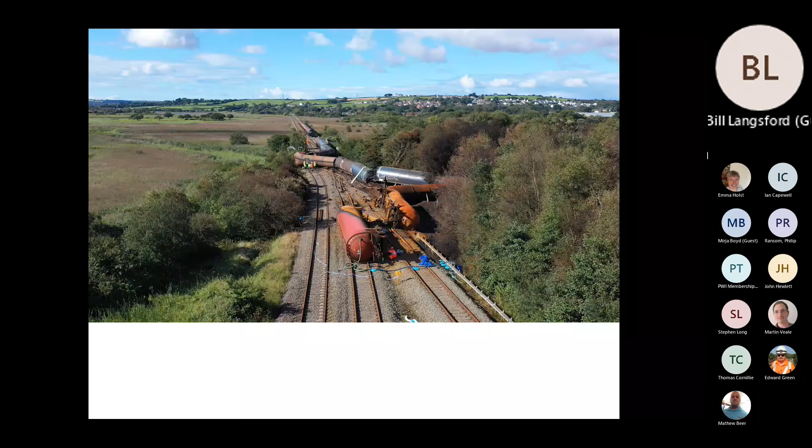Since then I've been an environmental regulator, regulating the water industry mostly. Most recently I was in flood defence and flood risk operations, then I've been sitting in the marine advice and planning team, where we license offshore wind and manage the protected sites around Wales. More latterly I've got involved with the two regulated shellfisheries in Wales, on the Burry Inlet and the Dee cockle fisheries, and again that's down to legacy research issues.

So I never really imagined doing that sort of career, that I'd actually end up giving a talk to the Permanent Way Institution. But I think my personal interests and my professional interests kind of came together on this one.

As you all know, on the 26th of August 2020, the oil train from Milford Haven heading east derailed at Morlais Junction near Llangennech.

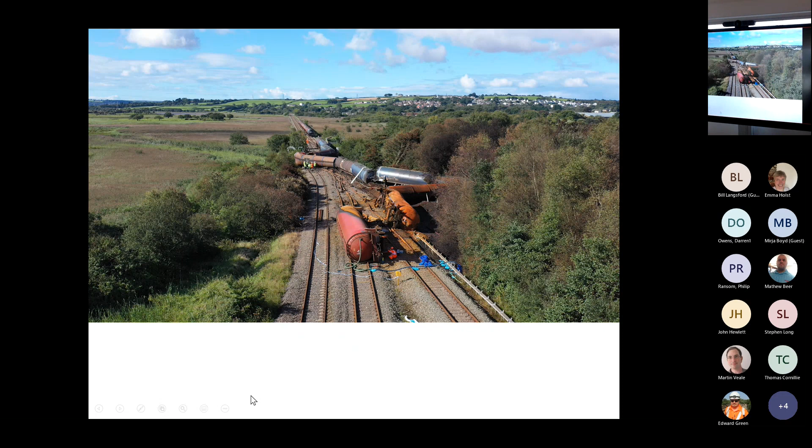As I said, I sit in the marine advice and planning team. Because I've been involved with incident management over the last 30-odd years, both in risk operations and on the environment side, and because of my knowledge of this particular estuary, the Burry Inlet, I was asked to be the recovery manager for the Llangennech incident.

This wasn't just Natural Resources Wales - under the Local Resilience Forum we're category 1 responders, so along with emergency services, but also the county councils, food agencies and so on, Public Health Wales. This was very much a joint effort, and there's no one single organisation - we couldn't have done it without everybody else getting involved and contributing. I've never worked with such a diverse and wide group of organisations before.

So before I get into the details of the incident and the actual recovery operation, I'll just tell you a little bit about the Burry Inlet and Carmarthen Bay and Estuaries area.

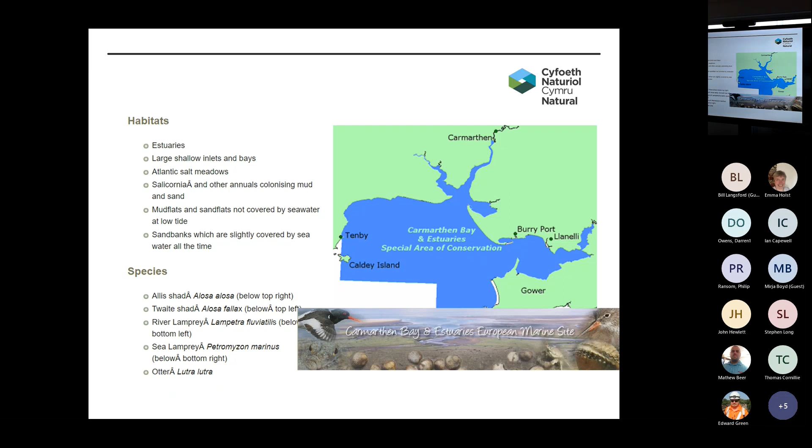It's pretty much got the highest level of environmental protection you can get. It's a special area of conservation, it's a European marine site. It's a Ramsar site for overwintering birds, and it's got a number of SSSIs and special conservation features around it, so it's designated for a range of different habitats and species, but primarily its importance for overwintering birds is what makes it really important.

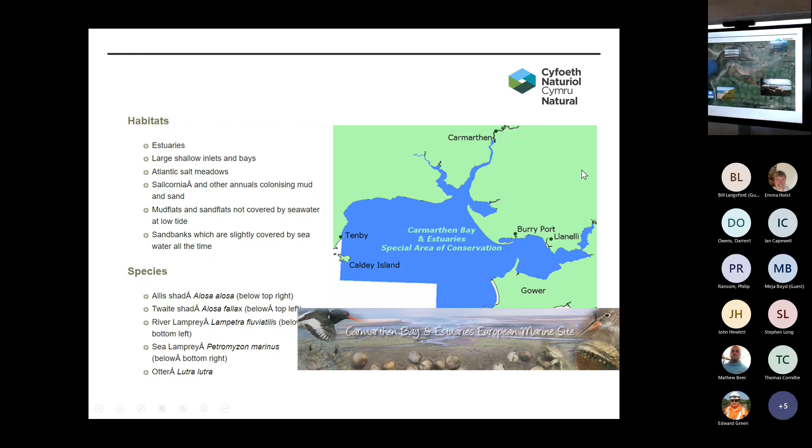The Burry Inlet is also a well-renowned shellfishery. It's quite a complex area with a number of issues. The conurbations to the north are highly populated, from Burryport through Pwll, Llanelli, Gowerton, Bynea - so quite dense populations, and the whole west of Swansea as well.

They all have sewage collection systems feeding into Llanelli wastewater treatment works, with a number of storm overflows dotted around the coast, and the same on the Gower side. You've got two blue flag beaches at Pembrey and Rhossili, just south of the estuary, and a number of undesignated bathing beaches within the estuary as well, at Burry Port and, to a lesser extent, Llanelli.

You've also got the largest salt marsh in Wales, Llanrhidian Marsh, and salt marshes extend further up the estuary as well, heavily grazed for salt marsh lamb. Salt marsh lamb is a well-renowned delicacy, along with the shellfish and cockles from the estuary itself, and that gives us a bit of a conflict in terms of regulation and management.

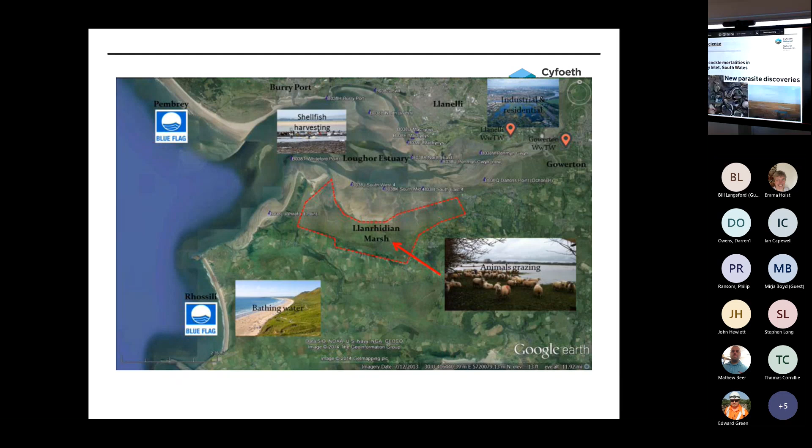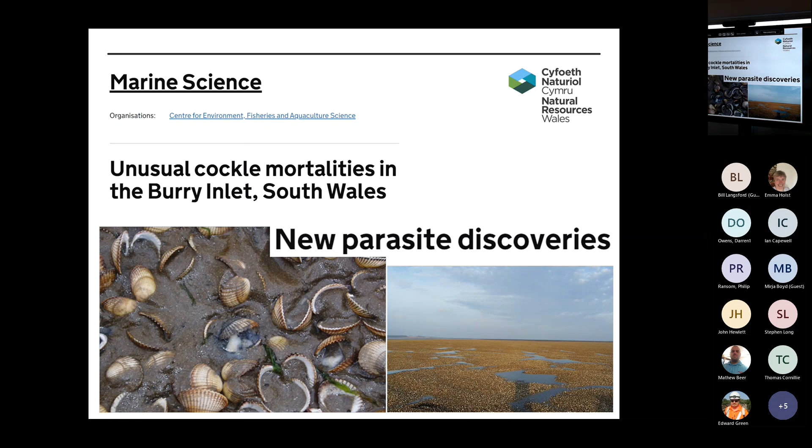It's had issues in the past, going back to the early 2000s. What was one of the most productive shellfisheries in the UK, or possibly in Europe, suddenly the shellfish started dying - the cockles were dying en masse, huge swathes of mass mortalities. Nobody knew the reason why, and various investigations were put into effect.

Because of my water quality background, I was asked to manage the Welsh government funded investigation at the time, and we were working with universities from around the UK. Lots of modelling was carried out.

This is just an overview of the hydrodynamic modelling we use - Dŵr Cymru Welsh Water models, but we asked them to develop these models as part of the National Environment Programme or the Asset Management Programmes. Basically you've got a series of nested models - Atlantic models, very coarse scale, moving into Celtic Sea models, slightly finer scale, and eventually getting finer and finer until we get to models for the Burry Inlet, where the resolution of the cell size is down to just a couple of meters. It's really hard to model hydrodynamically simply because of the shallow water and the very dynamic nature of the estuary.

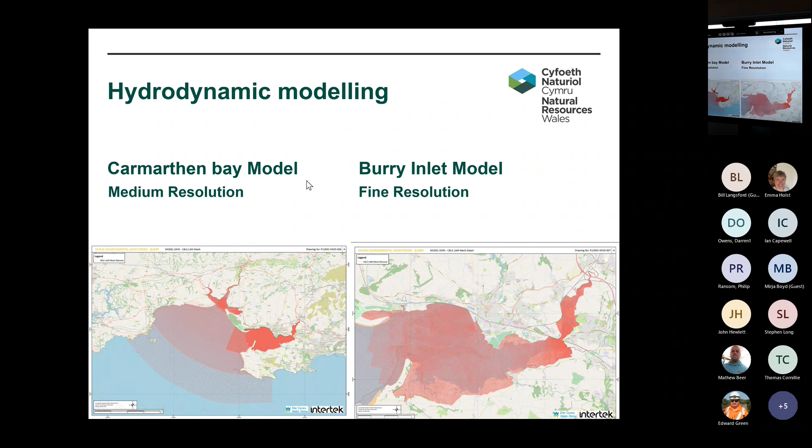It's a bit of a delay.

One of the things we use the models for is we want to know what the water quality is at all different points within the estuary, because this is where the shellfish beds are. So this is what source apportionment does. All of the inputs, including sewer network inputs, river inputs, and diffuse inputs like the runoff from the marsh on the south side, are all plugged in. Then based on those little cells you saw, which calculate movement, exchange, and dilution between each of those points in 3 dimensions, eventually you can work out the quality in different places.

This is a huge part of what we do, and it drives the improvement programs we have in place. This is what drives where Welsh Water spend their money to put better storm overflow storage systems in place, which is really topical on the news at the moment. In the Towy and Gwendraeth catchment areas, they were doing sustainable urban drainage and storm water storage 10 years ago, before it only just started hitting the national debate now.

So Welsh Water spent about 115 million, basically putting in a system converting any green space, roundabouts, school playing grounds, and putting new surface water sewers in, to basically take surface water out of the foul network, to protect the bathing waters and the shellfish waters in the Burry Inlet and Carmarthen Bay area.

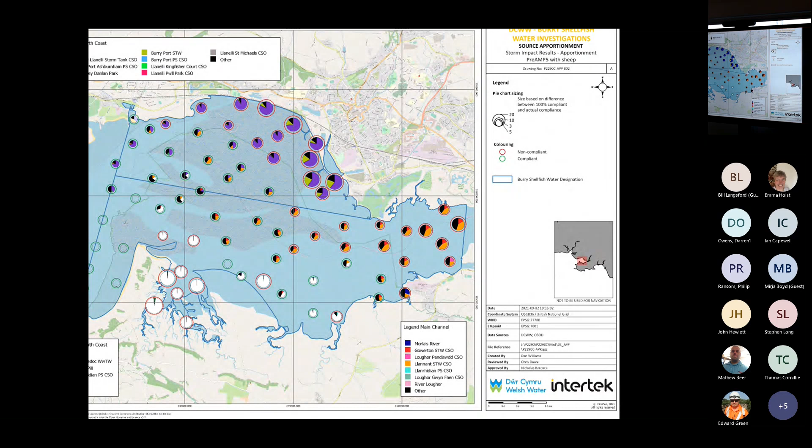This is the kind of output of some of the models we get from modelling the salt marsh here, just to understand what the bacteriological inputs were into the estuary.

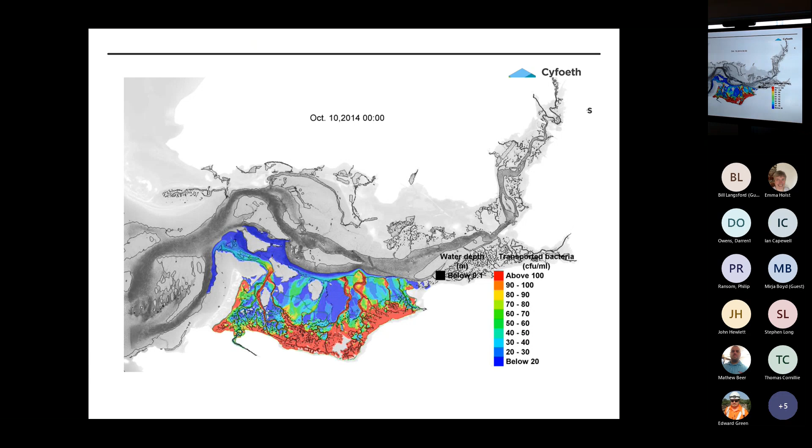Most recently, as I mentioned earlier, the cockle mortalities that had happened a number of years ago continued until very, very recently. We did a UK study investigation. We found out all we could within the UK, and came to the conclusion it was probably parasites, probably linked to either climate change or changes in the industry in terms of where cockles are sold and processed, what's brought into the area, biosecurity, and all those kinds of things.

So we were very lucky, we were able to push to get onto an EU-funded programme, which we probably wouldn't get onto now - the Atlantic Programme, where the Dee estuary and the Burry Inlet in Wales were part of this international collaboration. We had about €3.5 million and scientists right across Europe in 5 different states, focused purely on bivalve filtration corridors. Some really interesting things came out of it, in terms of disease risks in Southern Europe becoming more prevalent in Northern Europe, ocean current migration, and all these kinds of things.

So it's probably fair to say that this estuary is probably better understood than any other in the UK, from an environmental point of view, a hydrodynamic point of view, a hydrogeomorphological point of view, and from a biosecurity, shellfish disease, and shellfish hygiene perspective. It's certainly one of the best in Europe in terms of its level of understanding. We're really proud of what we've been able to do, what we've found out, and how we manage the fisheries and ecological features of the area.

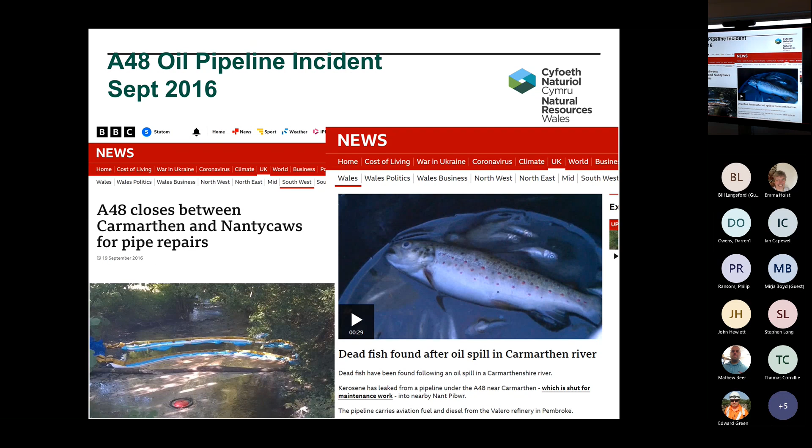It was probably simply because of the weight, because of traffic and so on. So they needed to do some repairs, and they planned to close the eastbound carriageway of the A48 for the week.

They basically dug a big trench, only under the eastbound carriageway, but the westbound carriageway was fine for some reason. The pipe was about 8 meters down, so it was quite a bit of depth. They got their GPS coordinates slightly wrong, so while they were putting their sheet piles in to make the trench, they actually put one of the piles through the pipe.

So I was sat in our office in Llandarcy in Swansea, minding my own business one Wednesday afternoon, and a call comes in from our Carmarthenshire environment team saying, 'We've got a bit of a problem, can you open up our scene room? We've got some oil in a river.' We often get oil incidents - domestic oil tanks, road traffic collisions - those type of events. You're thinking okay, 300 litres, through oil absorbers, spillage mats, you'll probably be fine. Then we get the report that it's 30,000 litres. So it's like, okay, this is a bit different.

The final figure turned out to be 140,000 litres, probably about half what Llangennech was, but it was into a very contained small stream a few miles east of Carmarthen, which discharged into the upper Towy estuary and again threatened shellfish beds. So it was a bit of a dilemma - we knew the oil was going into the river, but we didn't know where else it was going.

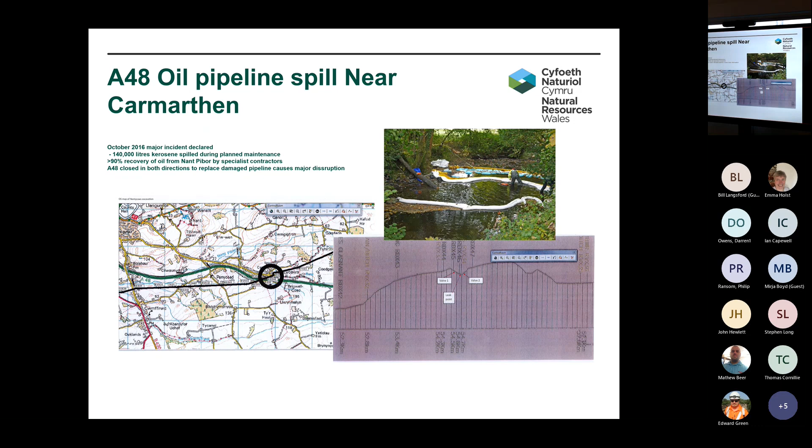Coincidentally, just last week we've had another oil incident on exactly the same stream, a similar amount, about 70,000 litres again. This time it was the service station at Nantycaws - somebody broke in, they've got overground diesel storage tanks, and somebody tried to nick about 20 or 30 litres for their car, put a siphon in, drove away, left the siphon in place, and it just drained the tanks completely. For a stream which had a huge amount of investment and was restocked with fish after the first incident, it's just been hit again. So we need to move away from oil as a fuel source, I think.

Okay, so just a little bit on the structure and how the incident was dealt with, back to Llangennech. On the night of the 26th, it was declared a major incident, and the usual local resilience forum command structure gets put in place - gold, silver, bronze command - and all of the LRF responders were working. It triggered the normal oil spill response, so the Maritime and Coastguard Agency was involved. They've got specialists who can do specialist modelling, using standard models as shown earlier. An environment group was set up, and its purpose was to ensure public protection and protection of the environment.

So I'm going to go through all of the statistics with you again. It's been the largest oil incident we've dealt with since the Sea Empress oil tanker disaster down in Milford Haven, although it wasn't anything like as large in quantity - it's probably only about 10% of the Sea Empress.

The locations were so much more sensitive in terms of affecting shellfish, affecting SSSIs, affecting special areas of conservation.

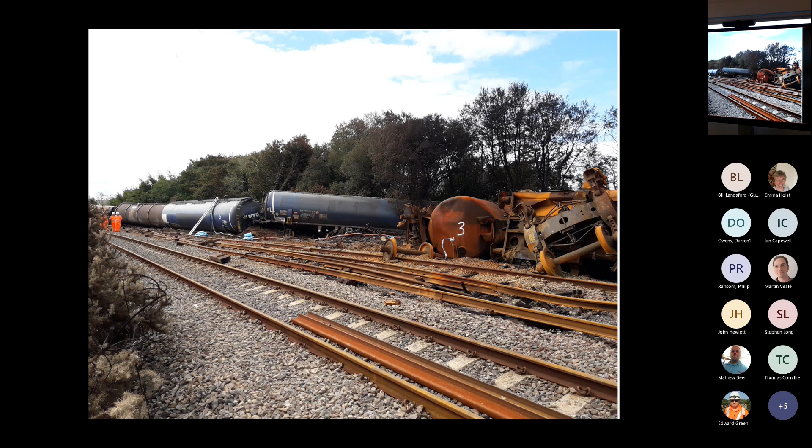We're on site doing similar work in the other part of the estuary. So after we got as many samples as we could, as soon as the crash site was declared safe, this was what confronted us. You've probably seen all the pictures before, but this was the wooded area to the north - this was the area primarily affected by the fire, and it was just pools and pools of oil on the surface.

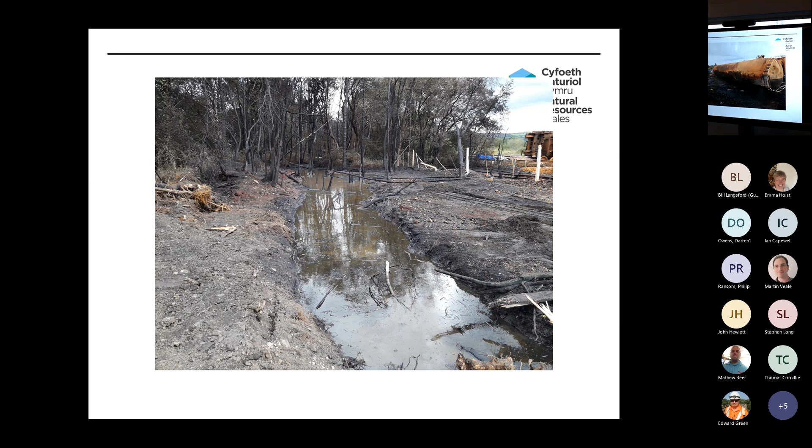So it was, as I said, you know, 30, 40 years, never ever encountered anything like this. It was quite sobering just to wander around and see the immediate aftermath.

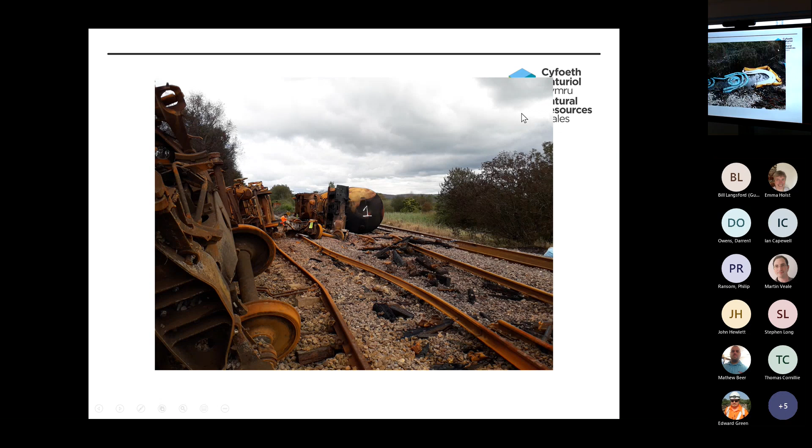Attempts were being made very early on to put dams in place, those cesses, those ditches to the north and south of the formation, and basically whatever oil absorbers were being put in place, filters were being put in place. So very quickly, mitigation measures were being put in place and assessments were being carried out.

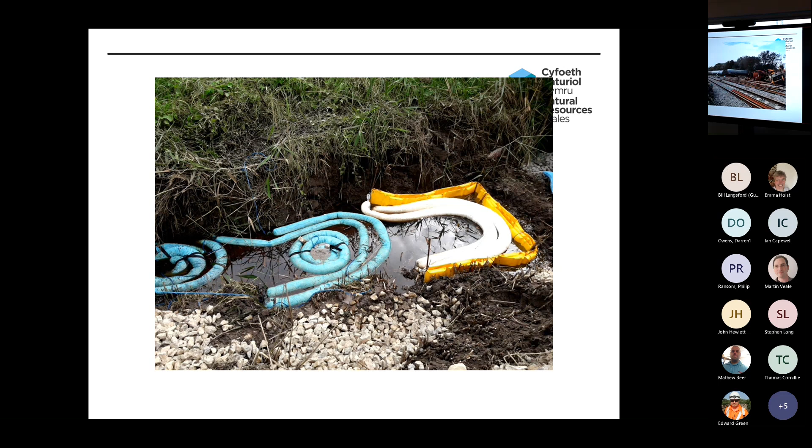The first week or 10 days, it was still in emergency mode. 400 people had been evacuated from their homes. They were put up in local accommodation, village halls and things like that for the first 24 to 36 hours.

There was the Strategic Command Group at the time, which was actually being chaired by the British Transport Police - it was under their jurisdiction. And then there's the various silver and bronze groups and the environment group.

My involvement was then mostly through the environment group, and we were thoroughly influenced by studying models from the Maritime and Coast Guard Agency telling us where the oil was, what concentration, how it was spreading out into the Burry Inlet, Carmarthen Bay, and so on.

The fortunate thing was the oil is a relatively light oil, so relatively volatile. So it doesn't stick around in the environment that long - it's not going to give the same long-term effect that, say, a heavy crude has got.

So it was a constant getting samples from the shellfish - they were going off to CEFAS, the Centre for Environment, Fisheries and Aquaculture Science. They've got laboratories on Lowestoft, so we would be shuttling samples back and forth to Lowestoft.

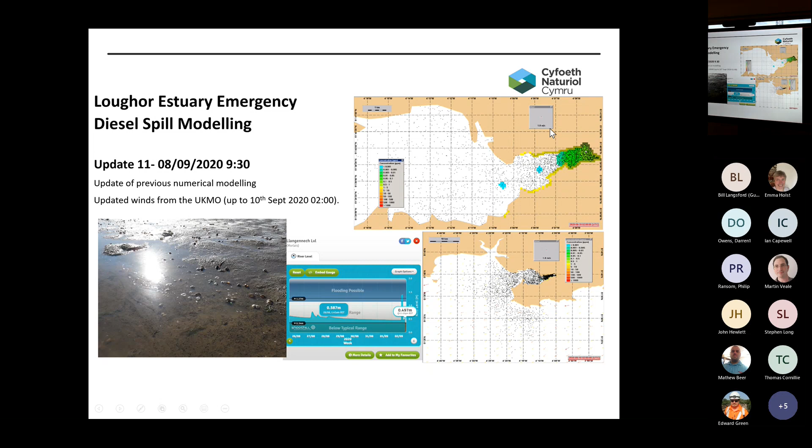So this gives you an idea of where those sample points were out on the estuary. There were mid-channel samples, taken by boat obviously, and then shore teams taking samples along the tide line.

The red dots are where oil was being found, green dots were clear. What was reassuring was that the actual models, the Maritime Coast Guard Agency models, were reflecting very well what we were actually seeing on the ground. So that gave us quite a lot of confidence that we could trust the models.

The part at the bottom left, that's our shellfish sampling points. The red dots is where we're taking samples specifically for shellfish to go off to be monitored for polyaromatic hydrocarbons, sent off for analysis. The purpose of that was basically to check levels of aromatics in shellfish flesh, and that was for public health purposes.

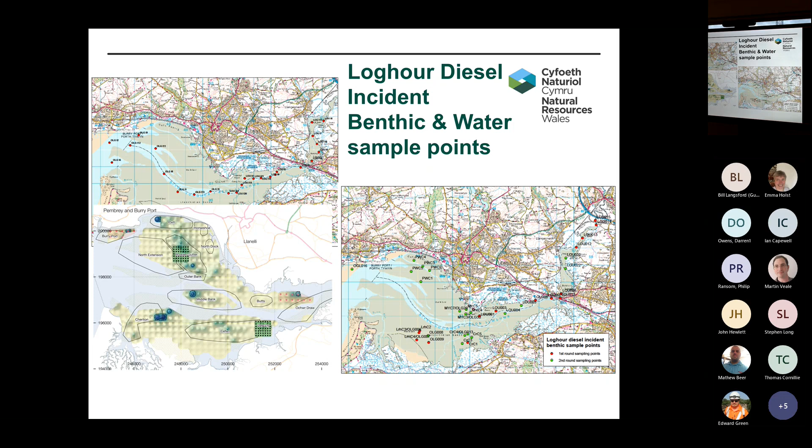We were working very closely with the Food Standards Agency, Swansea and Carmarthenshire Public Health Departments, and Public Health Wales.

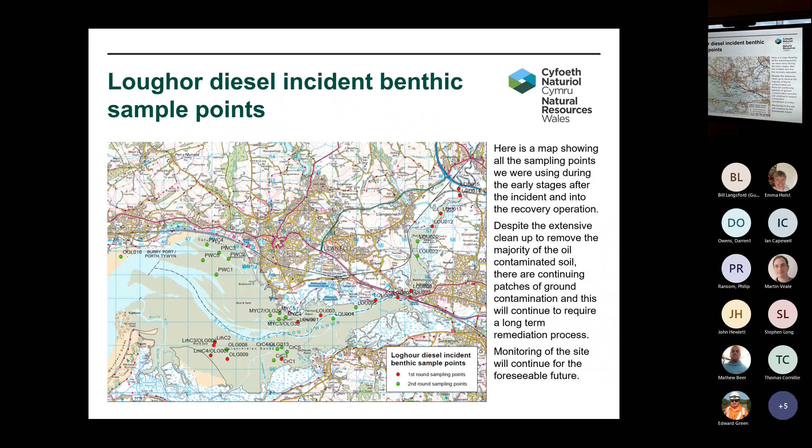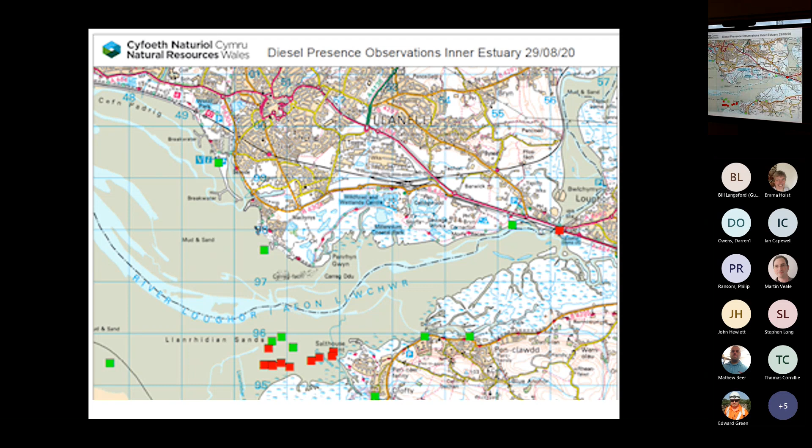I think that's just a zoom in of that last slide. We concentrated on some of the Crofty area, which was actually where the shellfish beds were, so that was an area that got a bit of attention.

I think it was about 10 days before the emergency phase of the incident wound down. Up to that time we'd been having daily silver bronze meetings, daily environment groups.

Once the site had been cleared and was safe, once it was out of emergency phase, it quickly went into recovery phase. That's really where command and control of the recovery operation then moved to Natural Resources Wales. Martin Evans, the South Wales Area Operations Manager, then became Strategic Command Group chair, and I was working directly for Martin, trying to coordinate all the information between the various groups.

So the meetings went from daily to weekly. The tactical group was primarily focused on the public health elements of the incident and the impact on the shellfish. That was chaired by Stuart Thomas, head of public protection in Carmarthenshire.

Then sitting below the SCG we had a separate public health group, again with representatives from Food Standards Agency, Public Health Wales, and various other organisations. The environment group was still standing at this stage, but that then got subsumed into all of these groups as the recovery operation continued.

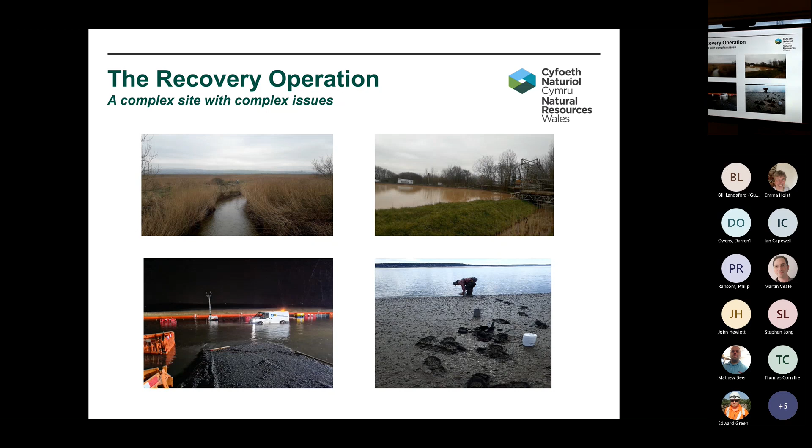We had a number of mini storms, the whole site was flooded out on several occasions, and not least we had the Morlais water treatment system right alongside the crash site.

This is just a bit of an overview of the crash site. You've got the Morlais water treatment settling ponds to the north, and then the junction between the Swansea district and the Heart of Wales line, where the derailment actually occurred.

You've got the heavily contaminated area, the purple hatched area in the middle, which is where most of the tank cars that ruptured and caught fire spilled their oil. So that was deep contamination of the formation there, and the water area just to the north.

We then have the extended area, which is the light grey, which was firewater contamination basically, so it had been low runoff. It was fortunate that the Fire and Rescue Service had a good, ready supply of water from the mine water settlement ponds. But there was an awful lot of runoff, and a lot of secondary contamination away from the actual main contaminated area.

And then we had two drainage ditches. The southern ditch, just on the border of the Marsh, which was a triple SSSI and a protected habitat. And then the northern ditch, between the Coal Authority land and the formation. So that was basically it.

And very quickly, boreholes were being sunk. Adler and Allan, who were the specialist contractors doing most of the work, working with Jacobs for Network Rail, were very, very keen to understand where the oil was, how deep it was getting, and started to think about the detail of the mitigation measures.

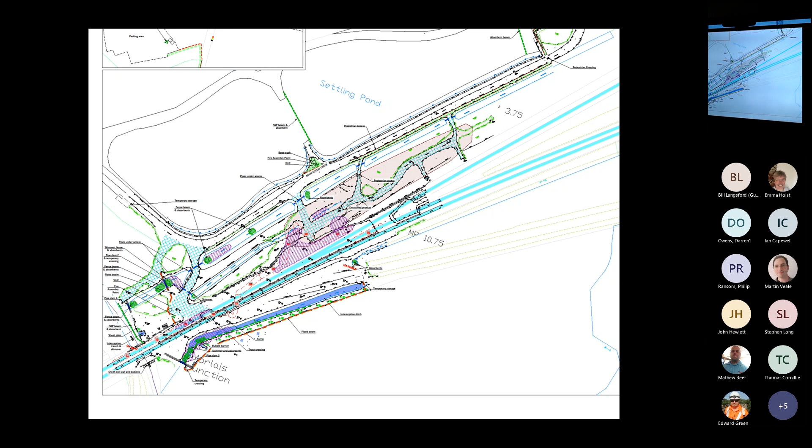So I'd say a little bit about the Morlais water treatment system, because it was a key feature that we couldn't ignore, and actually dictated working very closely with the Coal Authority, because a lot of the impacted area was actually their land. There was also some serious concern about damaging this and causing subsidence because of the excavations that took place later, which could have actually eclipsed the oil pollution incident in the first instance.

So the reason this is here, the Morlais mine water system, or mine system, the former Morlais Colliery and Brookfield Collieries on the other side of the estuary, one of the largest colliery complexes in the area, was discharging from an extensive network of abandoned mine workings, some of which are actually directly underneath the crash site. It was discharging ochre, or iron oxide, which is toxic and was actually causing parts of the Loughor estuary to fail its environmental quality standards.

There was basically a rust-coloured plume going into the estuary prior to 2003, when this scheme was put in.

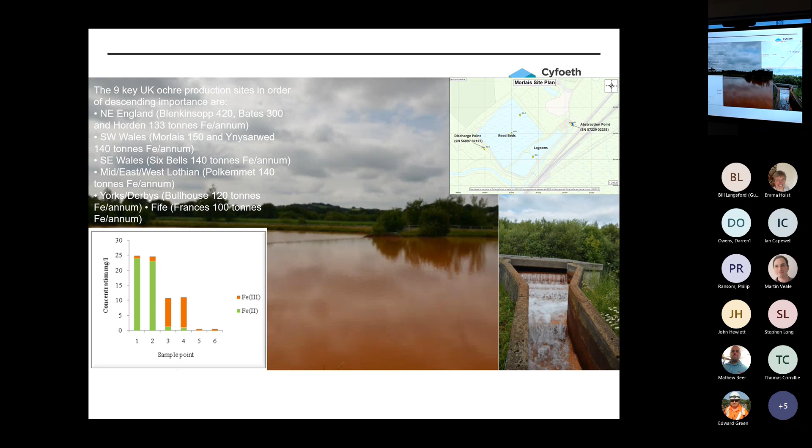So it's quite an impressive system. I mentioned the underground workings.

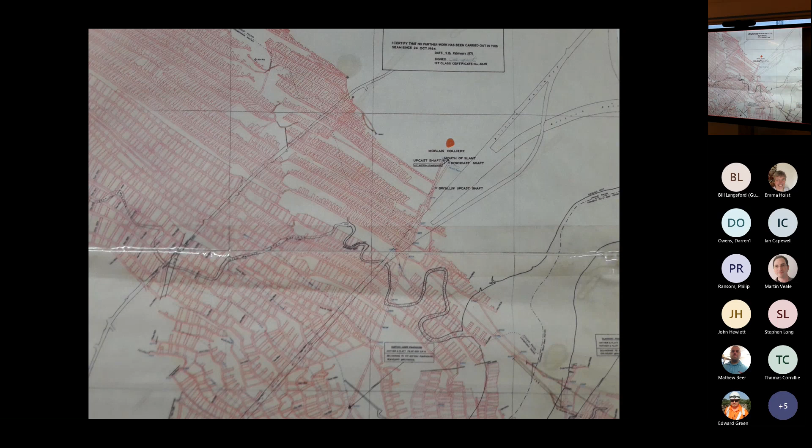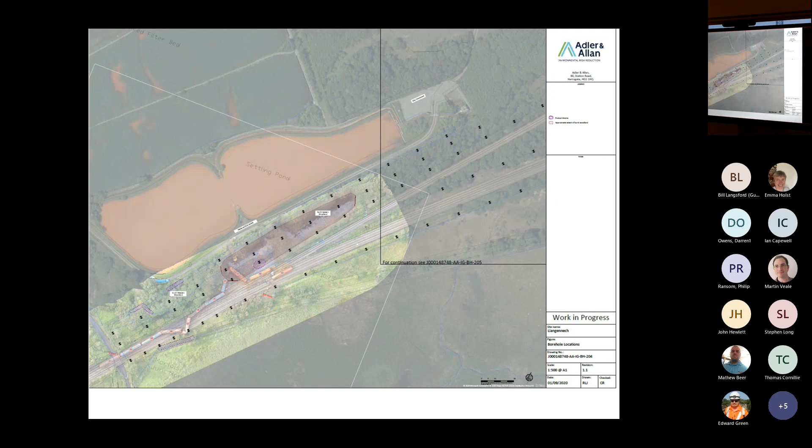And just on the plots, really, just to give you a feel of how the surface oil was being removed: pipe dams were created on the north and south sides of the two ditches, with absorbent materials, booms and oil skimmers basically. Not rocket science, but it works really effectively.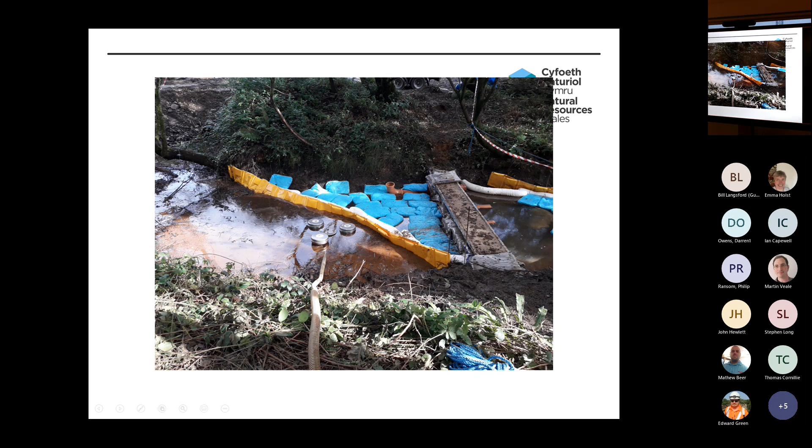This was during the intermediate phase of the works, where boreholes were going in, and this was all about going about wherever the plumes of oil were in the ground, and deciding what the best mitigation strategy was going to be.

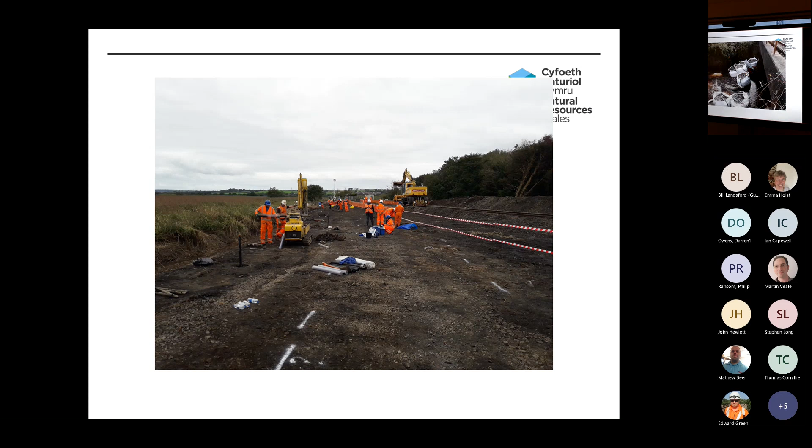The processes were: do you just leave it there? Do you try and pump it out? Do you use some sort of active treatment system? Or do you just remove all the contaminated material, as much as you can? It was the latter that eventually won the day, primarily for speed, because treating groundwater and contamination is a long process. These were bags of ballast going in.

Again, the Afon Morlais was a particular problem because this was on the southern side of the site, and there was a lot of oil escaping into that. So it was a case of trying to make a bit of a dam, a bit of a pool.

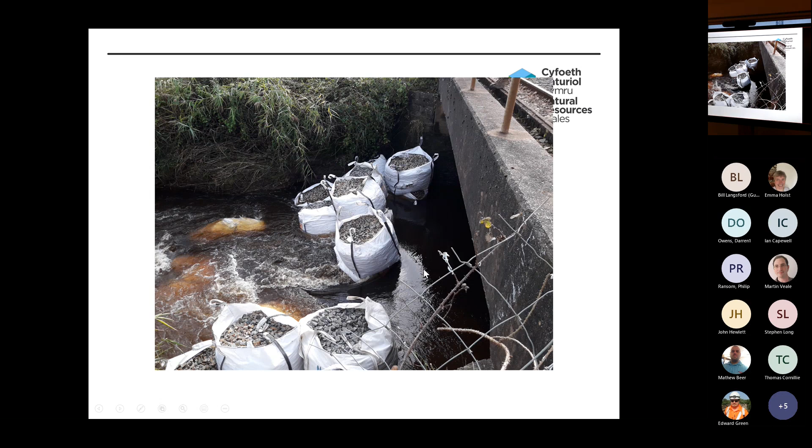This allowed a network of pools, pillows and skimmers to be set up upstream. This is the first east abutment of the bridge over the Afon Morlais, and there's quite a bit of seepage coming out around that structure. So there's a number of layers of defence trying to protect that watercourse.

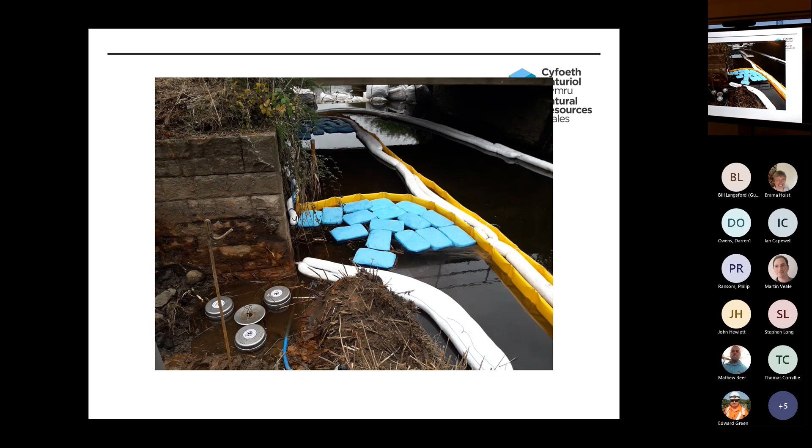That was the more permanent structure, which actually required land drainage consent from our flood engineers to put in place, which they did in a day. Pretty impressive, because they normally take months.

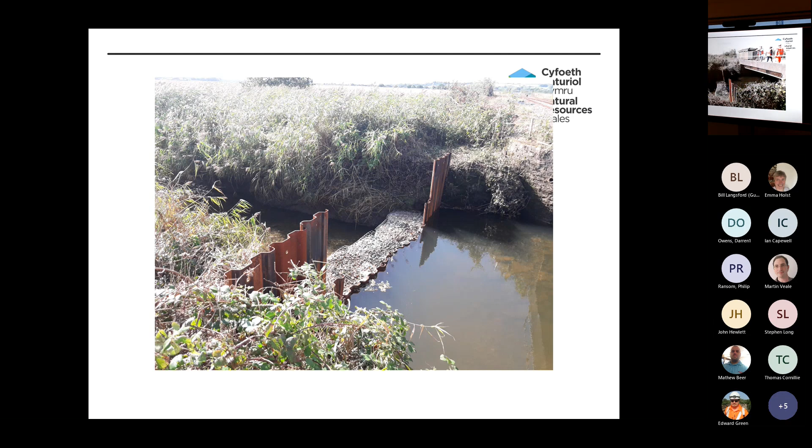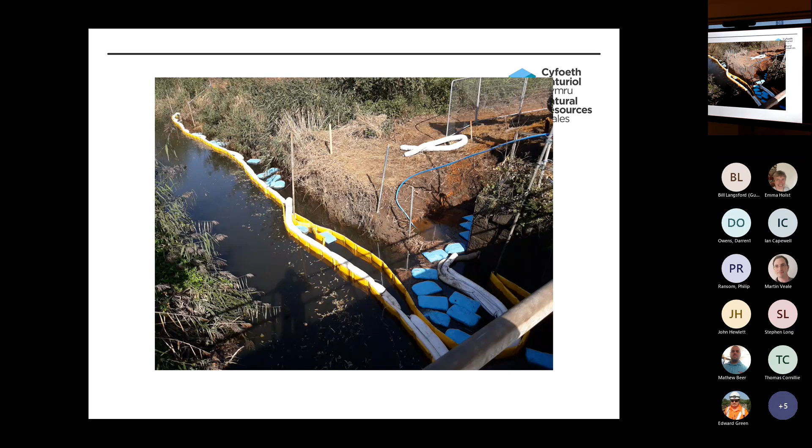Again, that's a view from the bridge of the booms trying to stop the oil coming out from the bridge abutment.

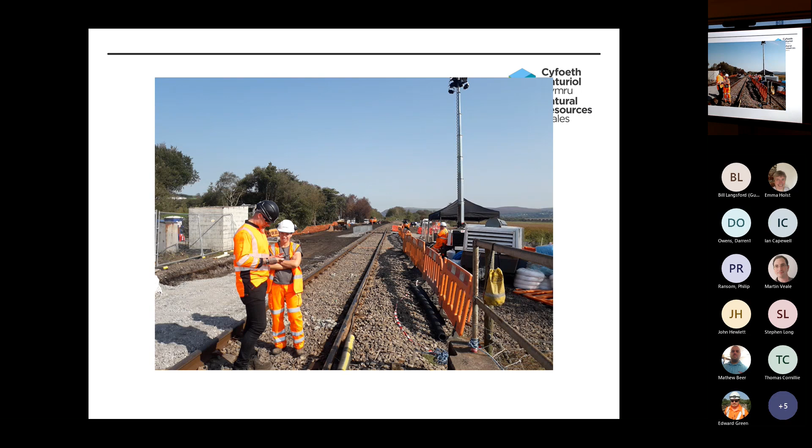So what you've got is a series of booms, pillows, and a double barrier. The idea of the double barrier is that when the tide comes in, it basically keeps the oil film to one side and protects the marsh area. And that was really effective.

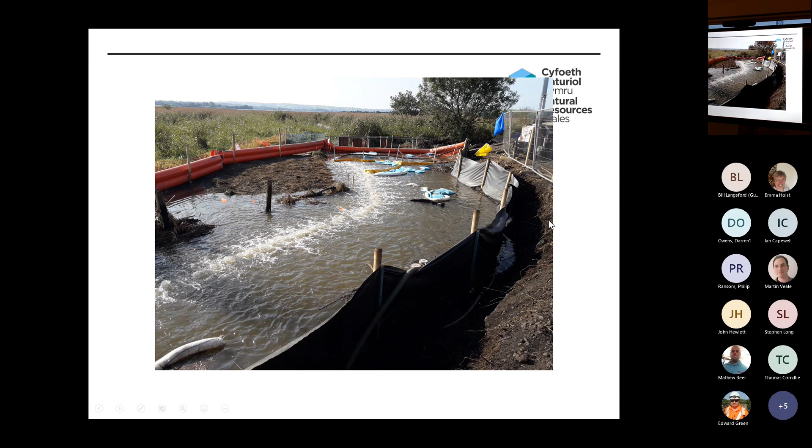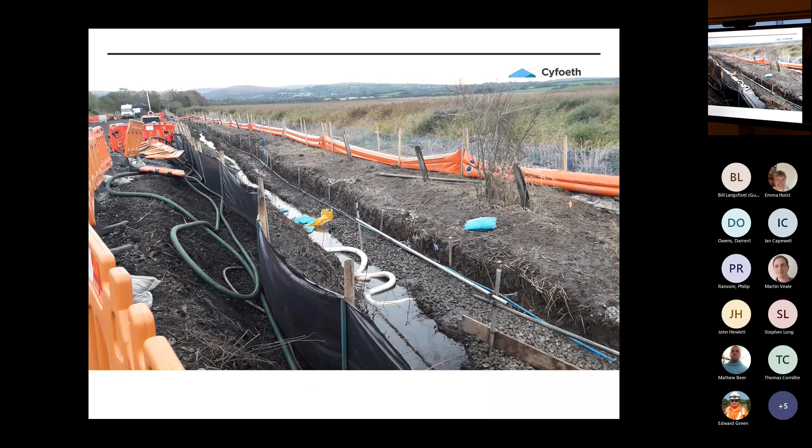That worked very, very well. I've never seen that before, but really, really impressive. That's with the tide out. You can see the blue pipe, which is basically the perforated air pipe, which provides that bubble barrier. And there it is again in operation.

When we started getting to the decisions made, there was lots of discussion, as I mentioned, about the best way to treat all the material, and the decision was made fairly quickly that because we needed speed to get the Swansea District and West Wales lines back open again, probably the best approach was actually to excavate as much of the contaminated material as possible.

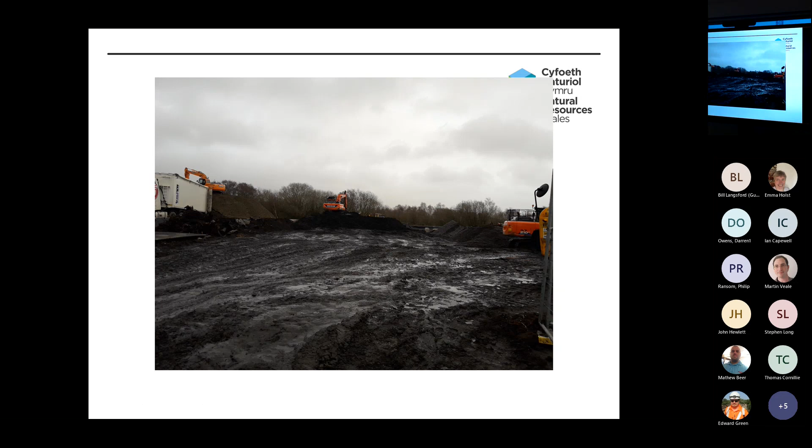So this was works up on the top end of the site, where they started to create areas where contaminated material could be moved and dewatered for taking away.

All long-term structures will be put in place again on the two ditches. This is a constructed oil interceptor.

Again, it required environment permits - two permits actually. It passes through two chambers with pipes below them - contaminated water enters, oil flows to the top, and then there's a secondary sort of scrubbing chamber, if you like, where hopefully you take all the oil out in the first, but you've got a second shot at it, so with skims again.

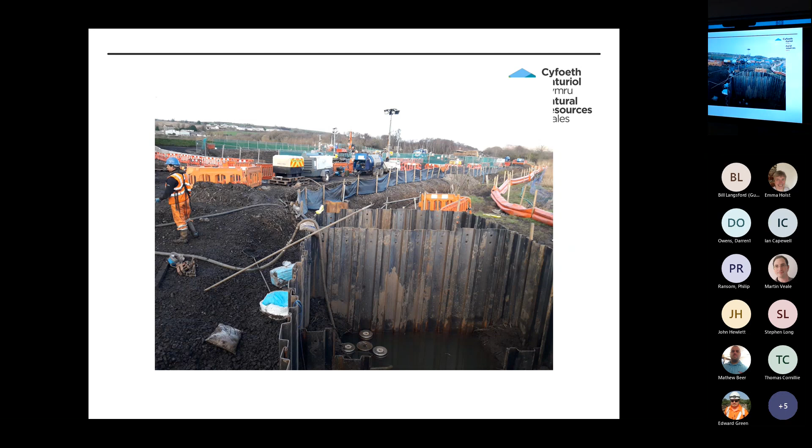So those are long-term - those are going to be in there for probably years as a precaution. And that's the completed structure. That's the north one.

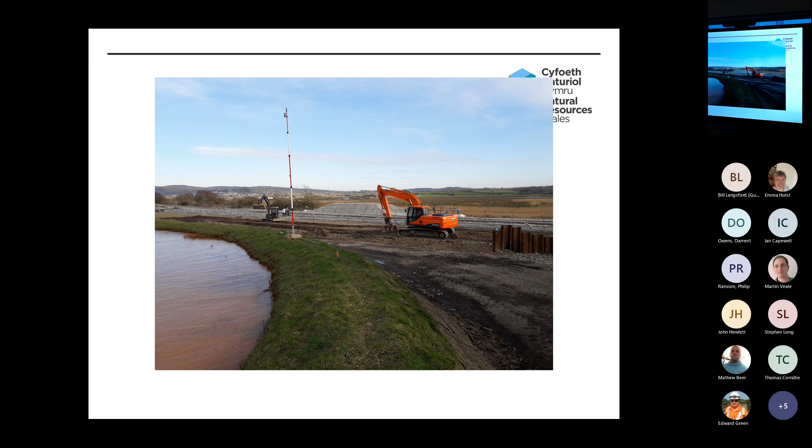This is the view from the edge of the lagoon, and this is where the excavations were beginning, basically, to remove something like 12,000 cubic meters. It stretched something like 150 meters by 20 or 30 meters wide, and something like 30,000 tons of contaminated material was taken away over the December, January, early February periods, 2020, 2021.

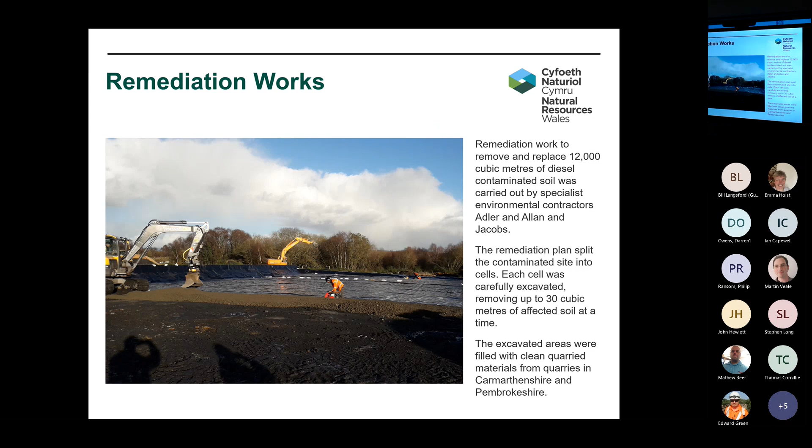That contaminated area was basically dewatered, and the bottom of the area, which was about the size of 3 big swimming pools, was put in place on the top half of the site.

So that's the plan for the excavation, basically the removal of the contaminated materials. It was a series of cells. The idea was each cell could be completed in a day or 2 - we didn't want the rest to go off. Once a cell was excavated, they wanted to backfill it as quickly as possible because they didn't want the oil material remigrating in and contaminating the further area.

There were some areas where we were concerned about upwelling mine water and didn't want to dig too deep there. It was quite a complex process deciding exactly how far you could go, to take as much material away as possible without creating unnecessary risk. Another concern was the bund of the settlement lagoon for the Port Authority lagoons, which were very close - probably 2 or 3 meters above the track, with excavations 2 or 3 meters below the track. So there was quite a head there, potentially, if there'd been any subsidence with heavy vehicles moving along that track.

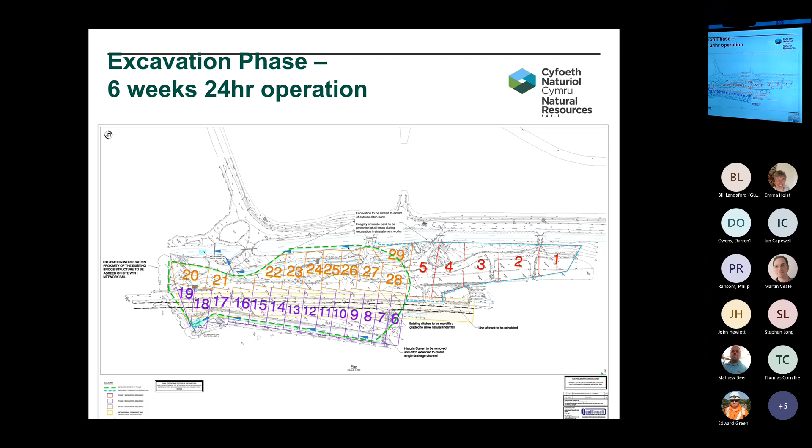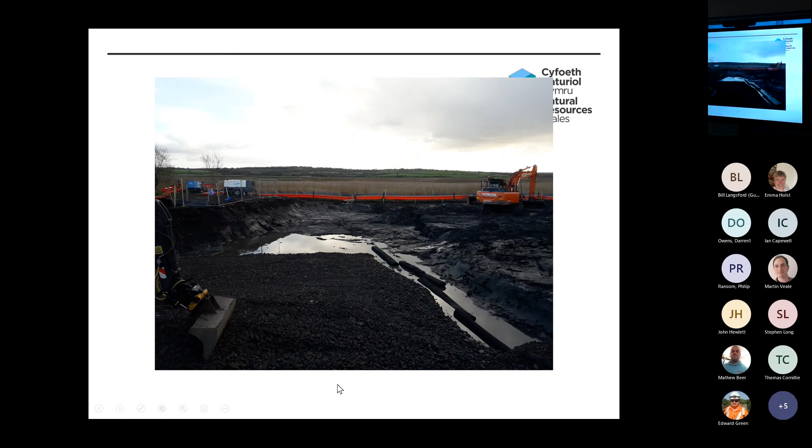Very good. So this was some of the excavation - this was one of the cells being excavated and then immediately backfilled.

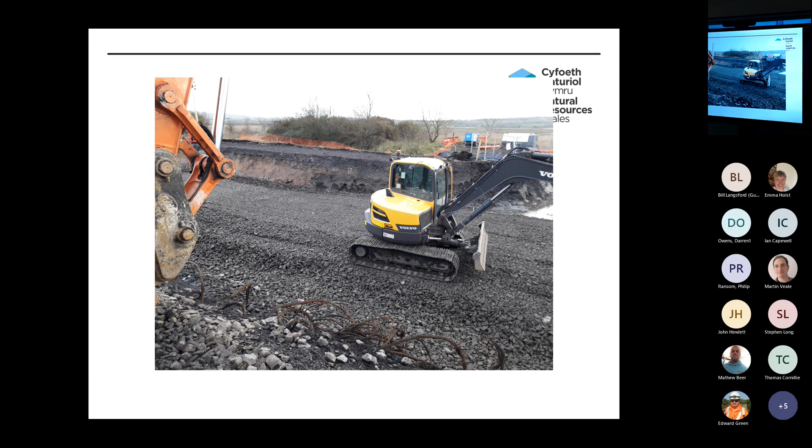We went to quite a length to make sure that the quarry material brought in was actually sourced from local quarries in Carmarthenshire and Pembrokeshire, to ensure its structural and geological chemical properties matched the bedrock and carbonaceous material already there, but also had the correct pH properties, because there were concerns about leaching to the triple SI. So it wasn't just any old rock - there was a lot of thought process in sourcing and finding the right material with the right structural properties.

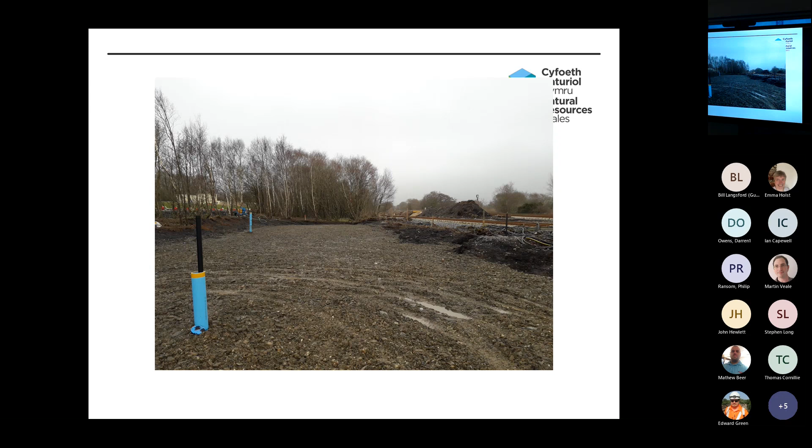So it was a continuous learning process and understanding - has the excavation process achieved what it was supposed to have achieved?

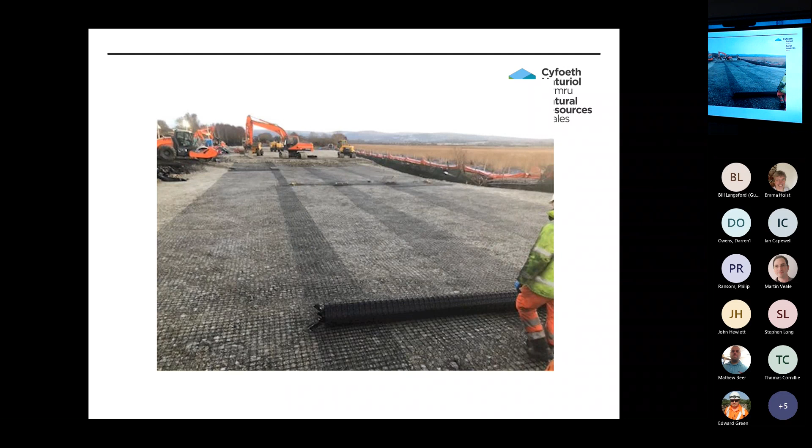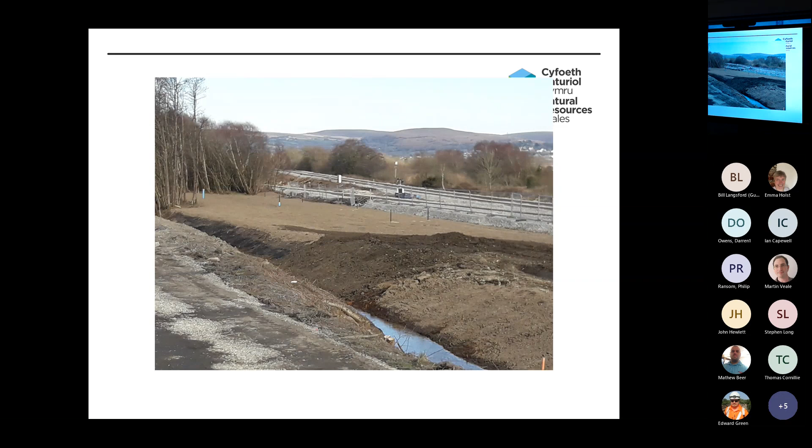That's just an aerial shot nearing completion of the backfilling process - the final compacting, HDPE liners and netting for structural integrity, then the final tracks back in place, and the final landscaping and topsoil going back.

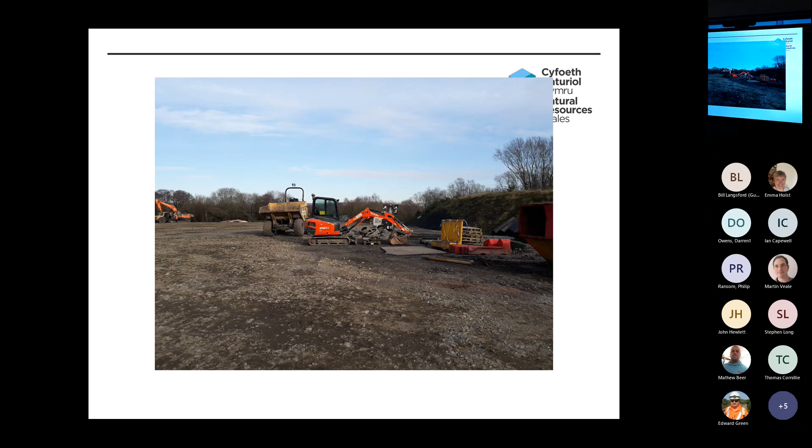This was the site with the big processing areas, which all went up to Merthyr. I did that with the lorry movements - I've forgotten the exact number, but it was hundreds, thousands I think. This is the site in its final stages, just prior to the planting and the opening of the route.

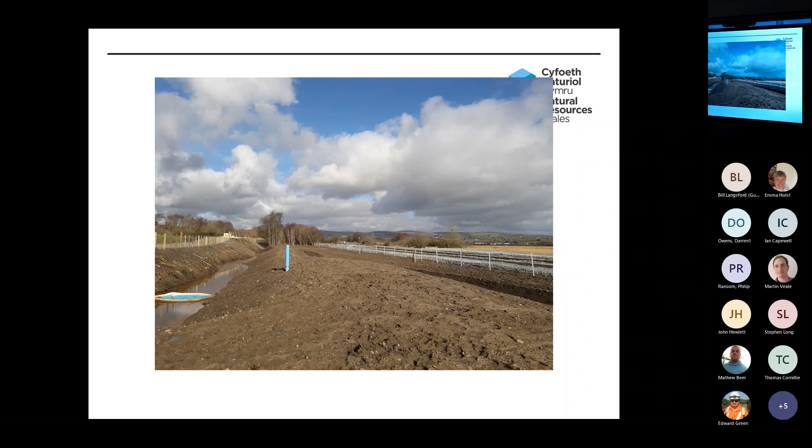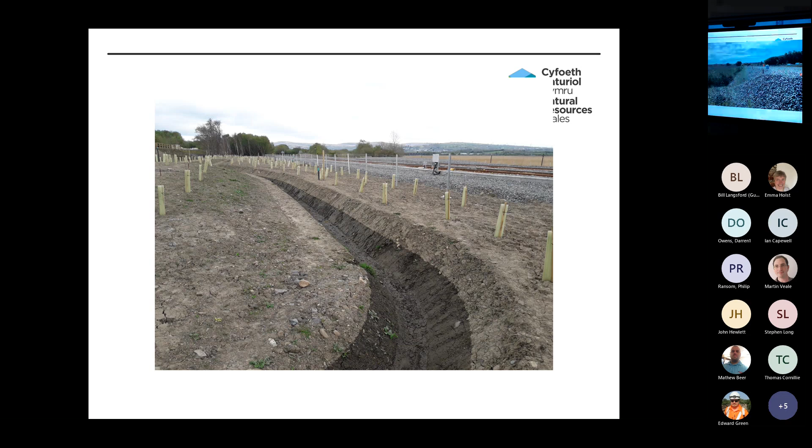I think this was actually opening day in March. Again, it was timed around the tide still coming in, to finish those ditches on the southern side of the site - looking railway-like again.

So that's pretty much it, really. There's a huge amount of information out there - the Rail Accident Investigation Report is a wealth of information, and there's a really good website as well where you can read all about it. Adler and Allan, the contractors, have done a video and various presentations going into a lot more technical detail on all the work they've done.